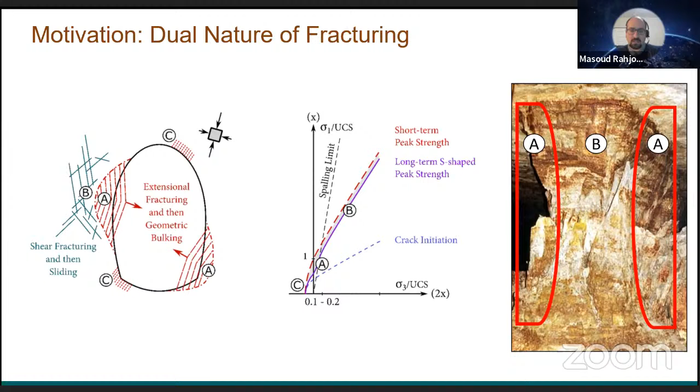However, there have been observations in the past 50 years about the formation of extensional fracturing just at the shell or perimeter of excavations under confinement. These are of main interest to many engineers, because the formation of these fractured rocks affects the support system, and can be a hazard if the fracturing progresses in a violent manner. So to understand the mechanism better, I looked at the data that was available at the time.

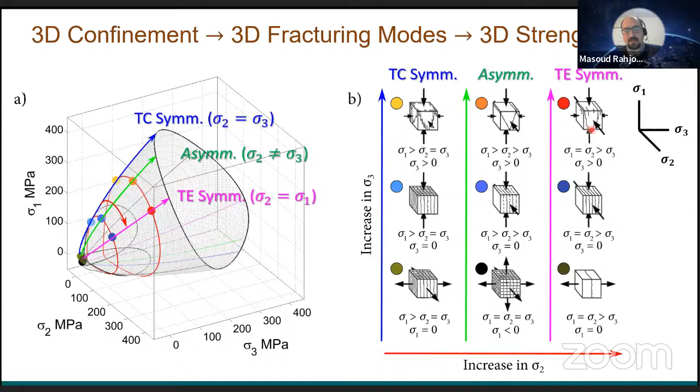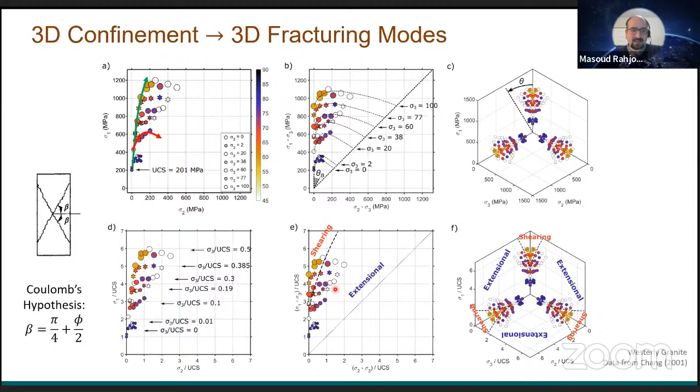With the increase of sigma 2 under confinement, we go from extensional fracturing that we had under low confinement, which becomes like planar slabbing kind of shape of fracturing. Under higher confinements, we go from shear fracturing to extensional fracturing as shown here. Please notice the amount of confinement at which extensional fracturing is expected to happen.

There are a few paradigms in rock engineering about the fracturing mode, about dilation or compaction, about friction and cohesion, fracturing under biaxial stress conditions and how it can be interpreted to a 3D stress state, failure of the rock mass under 3D stress state, and how we model it. Today I'm just going to talk about the first two, the fracturing mode and the dilation and compaction, with regards to the topic of my research.

This paradigm, as I showed for the failure modes that I summarized, has a jump that ignores the extensional fracture under low confinement. If we assume that the asymmetric fracturing is captured by Coulomb criterion under triaxial compression and triaxial extension, then there is a jump between triaxial compression stress state to asymmetric stress state, and from that to triaxial extension or symmetric stress state, in terms of failure mode.

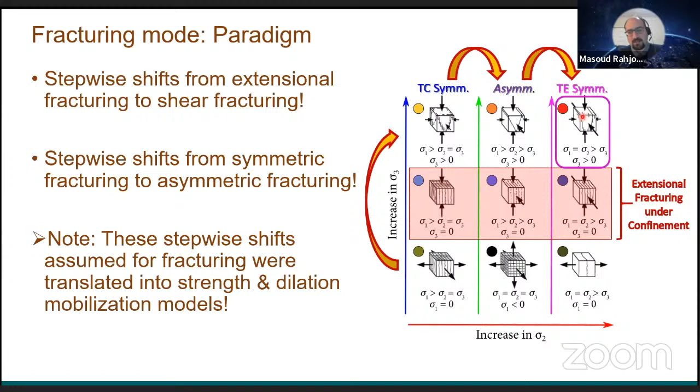Now, with regards to the fracturing, what I did was look at Coulomb's criterion in a different way. I rewrote Coulomb's criterion in terms of the effective shear stress, and then modified it to capture the multidirectionality of that. So here is the Coulomb criterion.

The interpretation here is that we get the maximum Mohr circle, and then here is the friction law, a linear friction law. We are looking for the maximum effective shear stress, which is found by finding the tangent to this circle parallel to this line.

The meaning of this criterion in 3D stress state is the envelope of the Mohr-Coulomb criterion as shown here. As you see, it's a kind of conical shape, and it is sigma 2 independent as expected. The meridians under triaxial compression and triaxial extension are shown here.

Now, to modify it, instead of only using the maximum effective shear stress on the largest circle, I use whatever effective shear stress is on the circles, wherever they are positive. So basically these three points, and again the criterion as shown here.

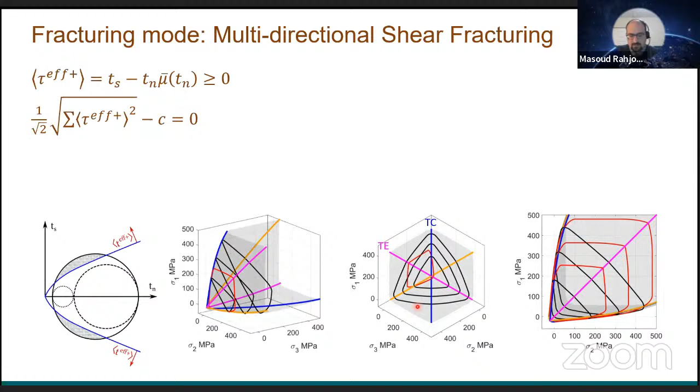With regards to the fracture mode under extensional fracturing, I looked at a parameter that can be negative under confinement as well. I looked at Mariotte's maximum axial extensional strain, but it was not enough because it is for tensile stresses. Then I looked at Navier's maximum lateral extensional strain, which means that under axial confinement or axial compression, the lateral extension can be used for the criterion.

I modified this criterion to capture the confinement dependency of the criterion as well, with application of confinement in the direction of extensional strain. Basically, the rock gets more strength, and fracture requires more extensional strain to cause fracturing.

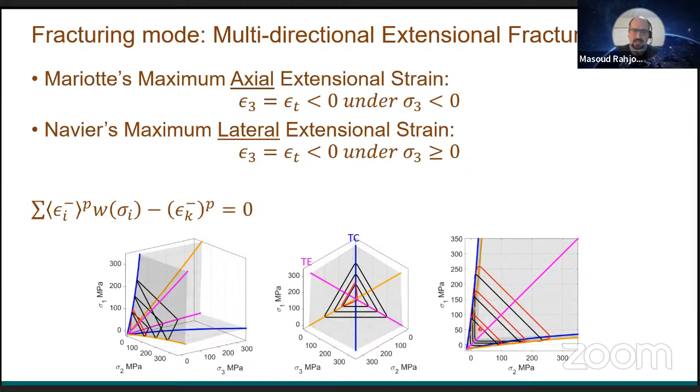The envelope of this criterion, as an example given here, is concave, surprisingly, but at low confinement it is a triangular shape in the octahedral plane, and the sigma 2 dependency is captured.

Then I combine these two, and by combining these two, we get a 3D criterion that is applicable to extensional fracturing as well as shear fracturing. Please note the S-shape curve characteristics: in low confinement, it is mostly the extensional criterion applicable for extensional fracturing, and then it switches and transits to shear fracturing, which is again 3D.

I modified the existing criteria to capture these S-shaped characteristics as well. I used 3D Hoek-Brown and Mohr-Coulomb, 3D Mohr-Coulomb. Here I show the 3D Hoek-Brown criterion.

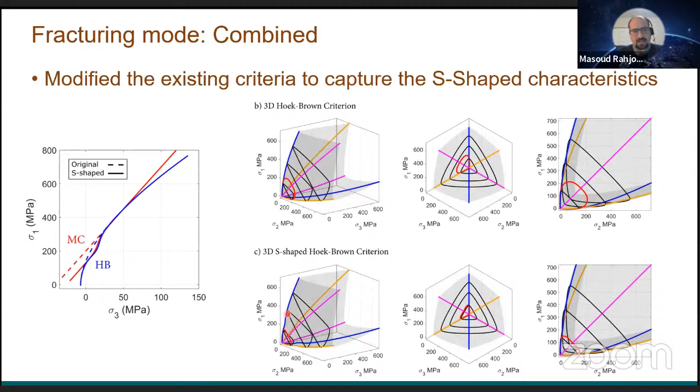As you see, it is altered in a way that it captures that S-shaped characteristics. The other paradigm I had to deal with regarding understanding the behavior of brittle rocks is related to the definition of dilation and compaction. Dilation and compaction are basically a means of understanding the relative straining of the material - for example, for a given shear straining, how much volumetric change is happening, or for a given increment of axial compaction, how much lateral dilation occurs.

Reynolds hypothesized this concept back in 1885, but for the past 140 years almost, the dominant approach to dilation has been volumetric. So even the term dilation, in the minds of geotechnical engineers or other engineers working with deformable solid material, they take it as volumetric. However, the directionality and directional definition of that is also very meaningful. The volumetric definition has been used for soil, concrete, and porous material. However, for non-porous or low porous material like rocks, the directional component is important for us.

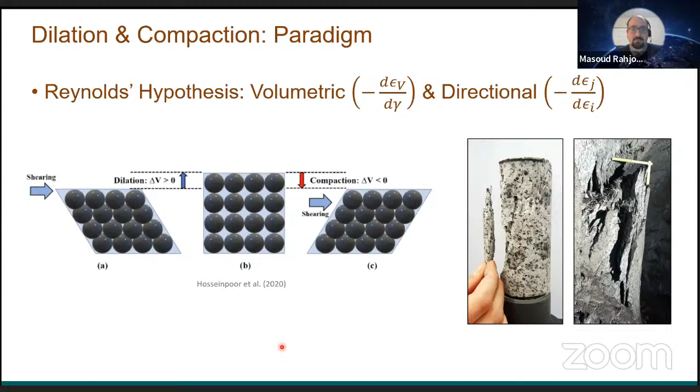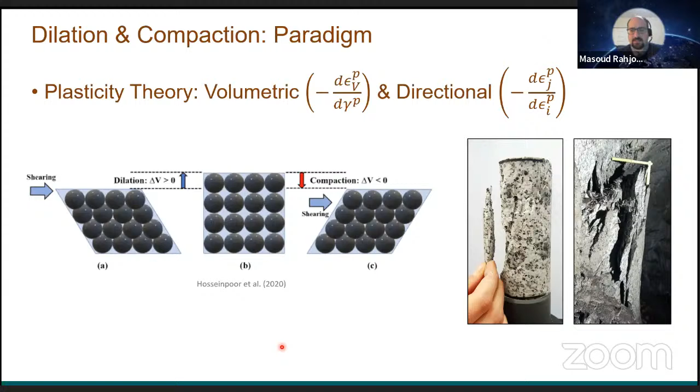In the context of plasticity theory, the ratios are defined based on the plastic strain increments, and the simple understanding of that is like the Poisson effect. The directional definition is like the Poisson effect: for a given increment of compaction in the axial direction, what's the increment of lateral extension? It's very important for us rock engineers when we think of practical cases.

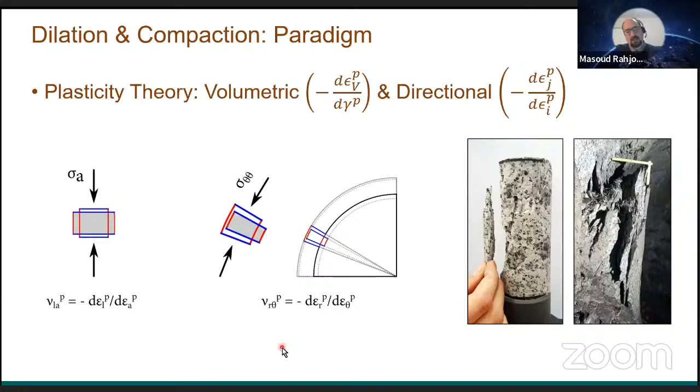For example, here is a tunnel, and we want to see how much radial deformation we get. The ratio here provides us with a means to understand, for a given amount of tangential compaction, how much radial convergence we get. Most importantly, we are interested to know how much confinement can prevent this amount of dilation, and if it is enough - this is a very important concept for the design of support systems.

As I said, under uniaxial compression, the terminology and definition is illustrated here. The ratio nu-2-1 plastic is the increment in the direction of sigma 2 versus the increment in the direction of sigma 1. Because the lateral direction is extending, a negative sign is added so that the ratio is positive when they're acting in different ways.

Under uniaxial compression states or all triaxial compression symmetric stress states, nu-2-1 and nu-3-1 are identical. There's another case, triaxial extension, which is again symmetric, but in this case sigma 2 is equal to sigma 1, meaning that in sigma 2 and sigma 1 we have compaction, and we only have dilation in the direction of sigma 3. The amount of dilation we get in the direction of sigma 3 is much larger compared to the triaxial compression case.

With increase of sigma 2, there is one intermediate stress state at which the influence of sigma 2 diminishes the amount of dilation we got under triaxial compression, and basically all the dilation goes towards the direction of sigma 3. With increase of sigma 2, we see a decrease in nu-2-1 and increase of nu-3-1.

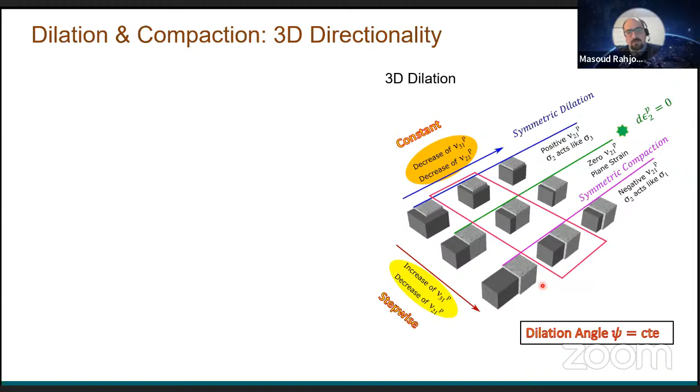Here is the relation between nu3/1 and nu2/1 for different sigma 2 values. The influence of sigma 2 is captured here with the stress ratio B. When sigma 2 equals sigma 3, triaxial compression, B is 0. When sigma 2 equals sigma 1, we are dealing with triaxial extension, and B is 1. For example, with a dilation angle of 36.87 degrees, the dilation angle under triaxial compression gives nu3/1 of 2, and it jumps to 4 as soon as we get to asymmetric stress conditions, where sigma 2 is not identical to sigma 3 or sigma 1. Under triaxial extension, it jumps again, becoming 8.

Under triaxial compression, nu2/1 equals nu3/1, and then as soon as it gets asymmetric, it drops to 0, because essentially the model is sigma 2 independent. This sigma 2 independency of the Mohr-Coulomb model is captured here, as well as here, but it's 0 — epsilon 2 becomes 0 basically. Then under triaxial extension, it becomes -1.

The trend is that nu3/1 increases with sigma 2, or increase of the B ratio, and nu2/1 decreases from whatever value it has under triaxial compression to the value it has under triaxial extension. The important point here is that there is a stress state at which epsilon 2 plastic becomes 0, and this differentiates the behavior of sigma 2.

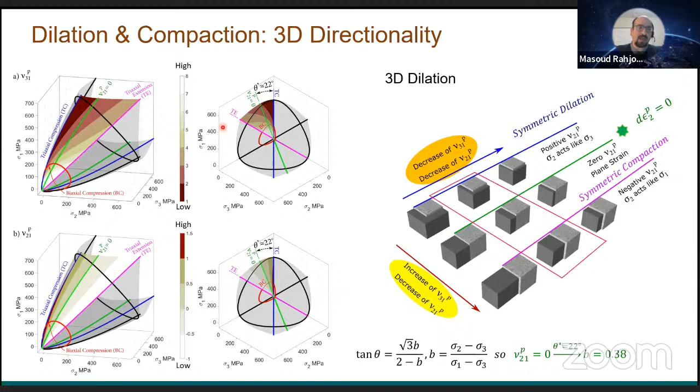There is a specific angle here, or stress state, theta star, related to that B, which gives the plastic plane strain condition. For this example, this angle is 22 degrees, meaning that for theta values or stress states close to TC, sigma 2 acts like sigma 3, and after that, sigma 2 acts like sigma 1. That is what this illustration captures.

To conclude, the 3D confinement affects the 3D fracturing mode, and these fracturing modes shape the way we think about the strength of the rock mass. The ignored cases of failure under low confinement, which are extensional modes, can be captured using an extensional strain criterion.

The extensional strain criterion presented is 3D, meaning it is 3D confinement dependent. The shear fracturing is also 3D, captured by understanding that shear fracturing is a 3D mechanism happening in all fabric orientations. By combining these two, we can get the full spectrum that we wanted to have.

Again, 3D confinement causes 3D fracturing of the rock with different modes, and these modes are comparable to the dilation framework I present. Under lower confinement, where we have extensional fracturing, whatever value we have for nu3/1 gets higher, and this nu3/1 gets higher as soon as the extensional fracturing becomes more like slabbing.

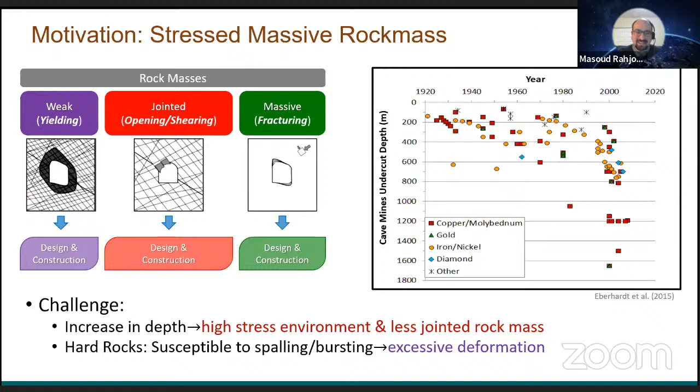This is excellent work and certainly an advancement of constitutive models in rock mechanics. I'm curious as to how you envision this work being incorporated more into rock engineering practice. Awesome question. You're pointing out basically to the three paradigms that I left out, which are with regards to how we model yielding of brittle rocks.

The existing paradigm is that cohesion and friction mobilize at the same time, and the way that most people are doing this work is through co-mobilization, a synchronized mobilization of cohesion and friction. However, the work of Hajiabdolmajid, Martin, Diederichs, and all these great researchers shows that we have to move on to cohesion-weakening, friction-strengthening concepts and use that.

The other thing is that there was an era in rock engineering where we had to rely on theories. We didn't have the luxury of having true triaxial machines, and we had to rely on theories. So at that era, around 40 years ago, we tried to bring whatever theory we had in fracture mechanics and apply that to rock engineering. And sometimes those theories don't exactly match the reality of the behavior.

The case of biaxial stress condition is one of those. There are many cases where criteria were developed for biaxial stress conditions, meaning you have a thin plate of rock or material. And then because of lack of material, fractures don't form the way we'd expect in a 3D body where there's enough material to form. So those criteria, like the Griffith criterion, that have been extended for general use, we should look back on those theories and revise their applicability.

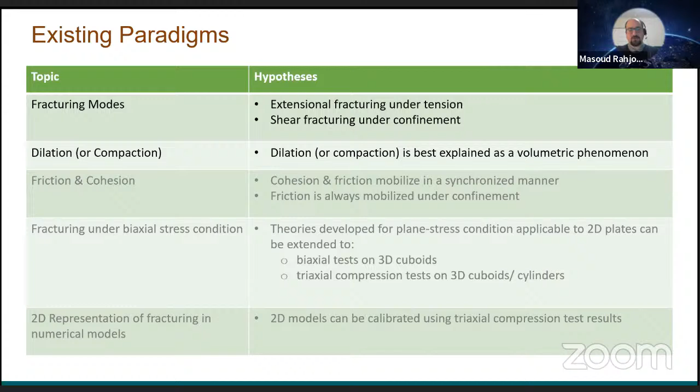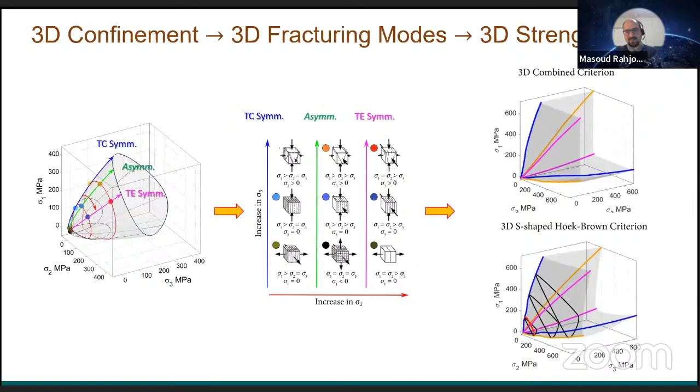Now, the implications of this 2D modeling, in my belief, are preventing us from moving forward. The way these codes are calibrated using triaxial compression tests is not, in my belief, the correct way, because when you consider the case I showed - one example I can probably share with my friends here - the plastic plane strain case, where you don't have any out-of-plane strain, is the case we are modeling in 2D when you have fracturing.

Under this case, the strength of the rock mass is higher than in the case of triaxial compression.

And the amount of dilation that this gets is at least double the value of dilatancy that you get under triaxial condition. So when you calibrate your model using triaxial compression tests, while the reality of behavior is this one, it gives you wrong results. If you get the same parameters and run a 3D model, you will get different values, which seem to be controversial, wrong, in your mind, but the reality is the code capability prevents us to go forward.

So I suggest, and what I see in the future, and I hope that we move fast, is that we get out of this 2D modeling and present the real behavior using 3D modeling.

Very good. Thank you, Masoud. I hope to see that day come soon. It will, I'm sure. Perfect.

Does anybody have any other questions for our speaker? I have a curiosity, if I can. Please. Yes. Okay, thank you very much for your presentation, also for the clarity in your speech.

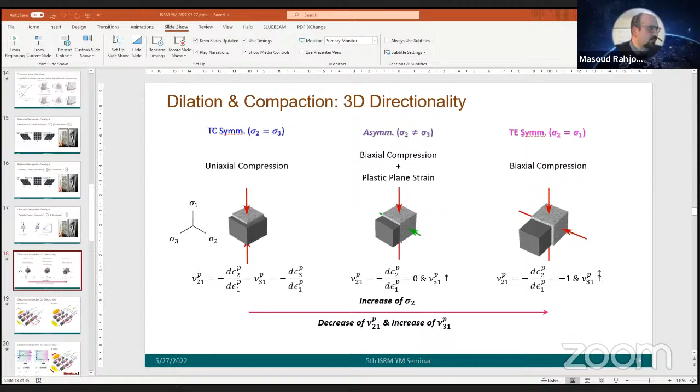Oh, sorry. Do you see my screen? I'm just curious. Do you see my screen in my PDF? We see the PowerPoint. I'm sorry, we see the dilation, compaction, 3D directionality. Yes. I'm sorry, one second. I'm going to share the other slide. Screen 1, maybe. No, screen 2. Yes. So now you see that, right? You see my PDF, yes.

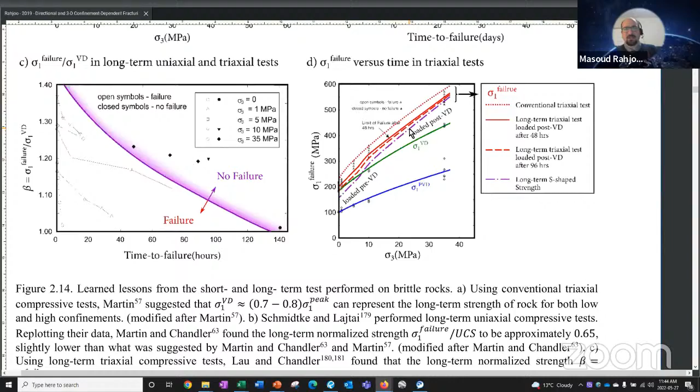Right? Okay, so yep, Dr. Chandler tested under basically controlled tests, basically this is a creep test kind of a way that he increased the level of sigma 1 and waited until it fails, and found the failure. Developed the envelope for these tests.

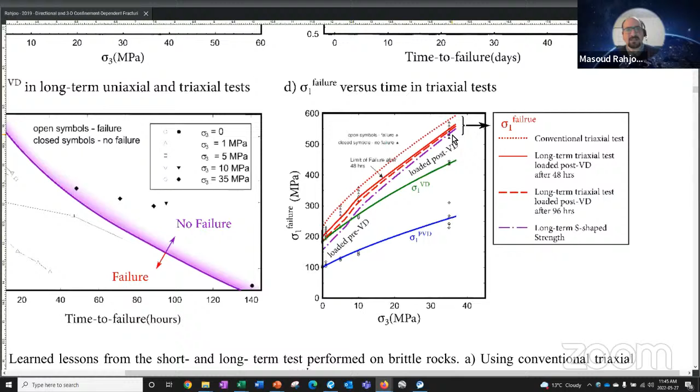Short-term tests versus long-term tests show that the decaying strength is not that much under higher confinement where shear fracturing is expected to happen, versus in low confinement, there is clear reduction of strength, right? So that idea about the S-shaped curve is kind of captured in his results.

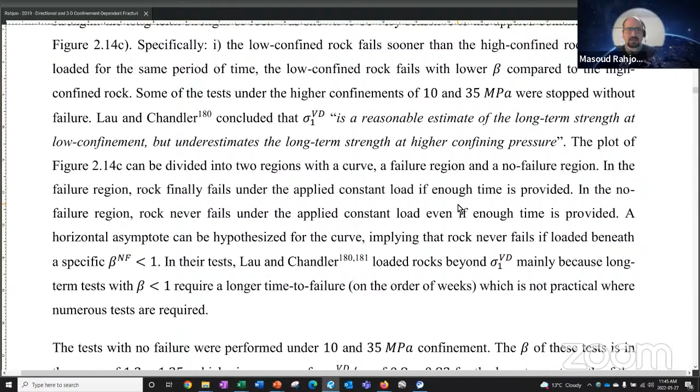What I did, I used triaxial test data that, again, Professor Chandler performed, and plotted the results in a way that are shown here. So sigma 1 versus sigma 3, crack damage, initiation, crack damage, or volumetric reversal, basically, and this is peak. Now, by plotting sigma 1 of each of these curves versus sigma 1 peak, you can find the stress confinement, basically, at which a transition between spalling to shearing happens.

So basically, when you plot the crack initiation, you see that it decays and gets a constant value, whereas the other one, for the crack damage or volumetric reversal, is constant. The other way to plot it is plotting sigma 1 over the crack damage. In this case, you see that this way, the other plots go up and get to a constant value. Or sigma 1 versus sigma volumetric reversal. Now this is it, and then again, you see that there's a spalling to shearing transition. So there is a way to find that spalling to shearing limit.

Numerically, people have done that as well. Professor Diederichs did that, as well as many others after him. Still, there is not a standard method to find this. I've not seen that yet. Maybe in the past year, I was involved in consulting, something came out, but I have not seen that.

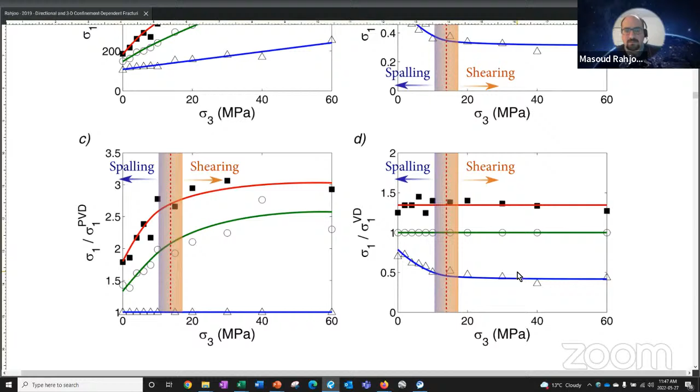However, when it becomes true triaxial with platens, measurement of that was hard until like 5-7 years ago, when people started measuring that. So basically what I'm offering is a hypothesis and a framework for more work.

At the end of my research, I saw a publication from the team of Professor Feng from China, where he did some analysis on the plastic strain increments ratio in true triaxial tests. But still, this is something that is going forward.

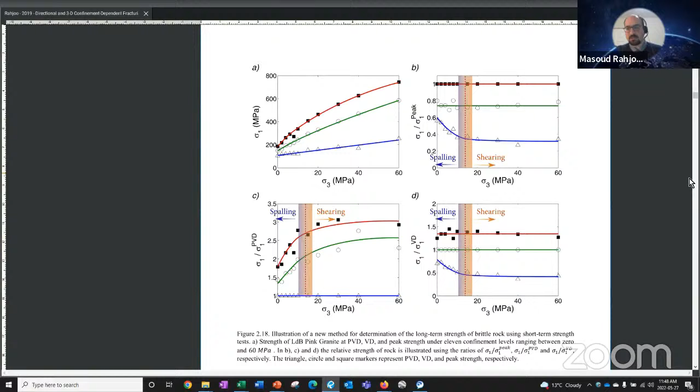With regards to constitutive modeling, this framework gives us some boundaries to know which criterion to use and which one would not work. For example, if you use the Drucker-Prager criterion, you might get a very, very large sigma 2 dependency kind of behavior, as shown here.

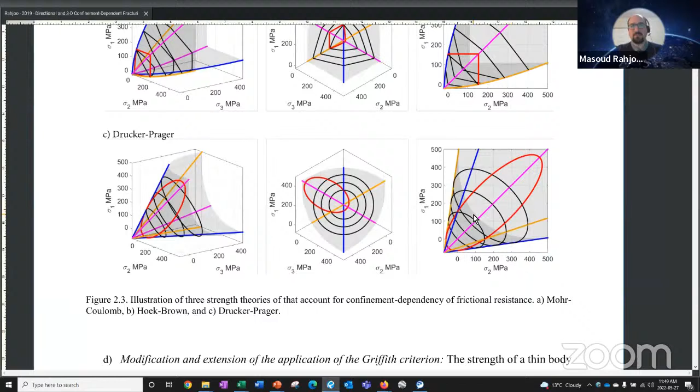And this framework can limit us from going this much high on the strength curve.

On the strength side, and also on the dilation side, the framework that I presented gives a correct understanding of what boundaries should be used, again for Drucker-Prager or other potential functions, models and formulations. It gives us a clear understanding of what is happening and how to parameterize the constitutive model so that it is not wrong, if it's not right.

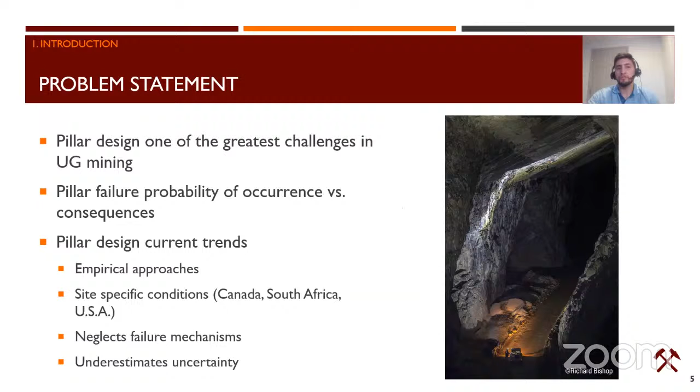A pillar failure is a low probability event in comparison to other ground control instability issues such as rock falls or ground collapses. Nevertheless, their consequences are far more severe. The collapse of a pillar often leads to the collapse of its neighboring pillars, also known as a cascade pillar failure. Pillar failures have not only killed and caused serious injuries to workers, but have also generated surface subsidence.

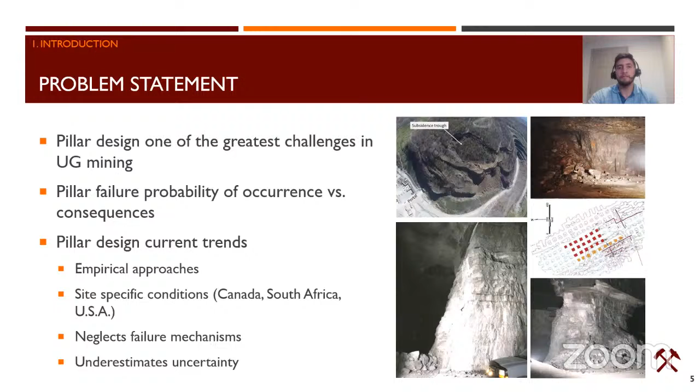And sterilized valuable reserves. Common pillar design trends are based on empirical approaches, and these relations are designed in most cases based on site-specific conditions, applicable only under certain specific circumstances. These equations are unable to represent the different failure mechanisms that can occur in pillars and do not consider geological and geotechnical uncertainty in the rock mass.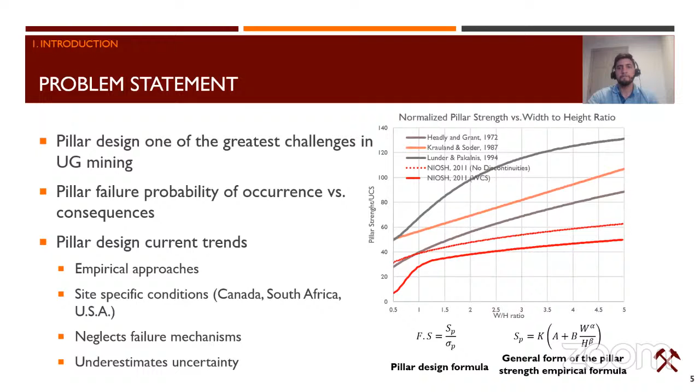As a reflection of this, pillar failures continue to occur, both within the US and internationally. In the past 5 years, there have been 5 massive pillar collapses in the US. This has raised the awareness and attention of the Mine Safety and Health Administration, MSHA. They developed an initiative called the Pillar Collapse Initiative, a dedicated website focusing on raising awareness on these issues and sharing technical content to prevent these events from continuing to occur.

As we can see, pillar collapses are events that can be referred to as high-risk events. Due to that, their design and maintenance should be addressed from a risk-based perspective.

This work proposed a risk-based pillar design approach based on laser scanning and virtual discontinuity mapping, stochastic discrete element modeling, and stochastic finite volume modeling to estimate pillar stress variability. Today, I will be presenting some of the results obtained from applying this methodology in a case study mine.

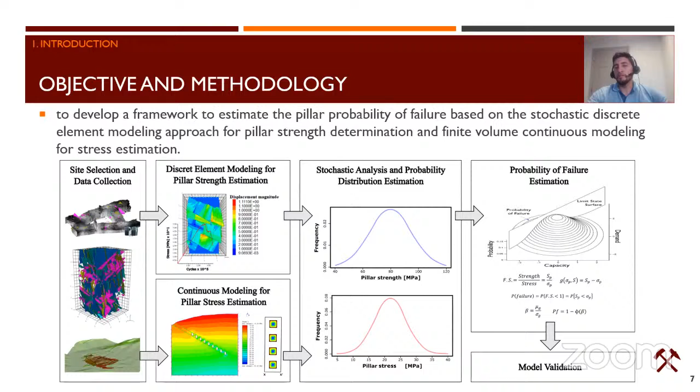In this section, I will briefly introduce the case study mine, design, and geomechanical parameters that were used as inputs in different analyses of this project.

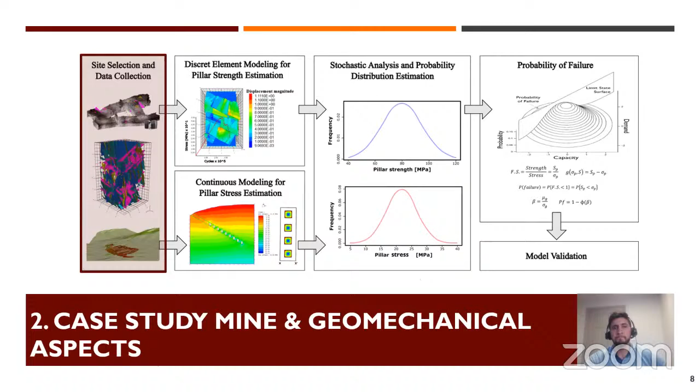The case study mine consists of a room and pillar operation with eventual stoping. In areas of the mine where the limestone seam is consistent and thick enough, 12.8 meter wide and 30 meter high stopes are formed. The open stopes are supported by squared, 24 meter wide and 30 meter tall pillars. The main ground instability hazards encountered in this case study mine are related to the presence of discontinuities and karst features. Due to the presence of a clear discontinuity network in the rock mass, the main failure mechanism defined was structurally controlled.

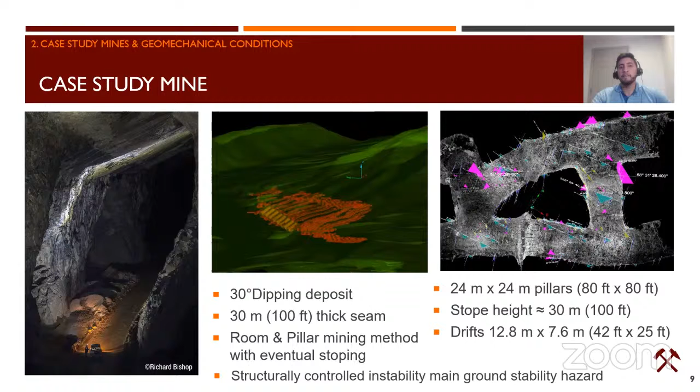The table below summarizes intact rock mechanical properties for the three main lithologies. This data was provided by the mining operator and consisted of 6 density test results, 6 uniaxial compressive strength tests, and 6 Brazilian tensile test results for each lithology. This information was used as inputs for the different analyses and calculations. The data was limited to the number of samples mentioned, and it was not clear where the samples had been collected from.

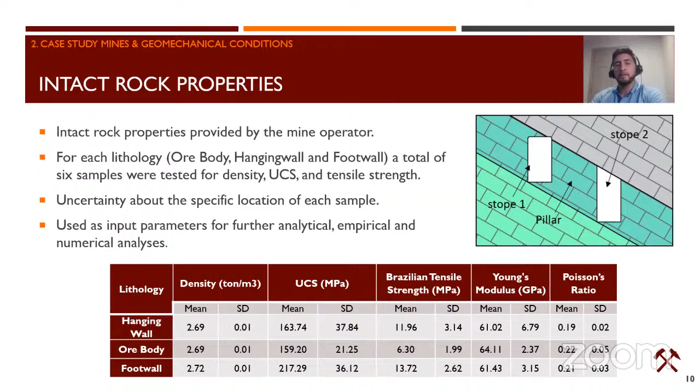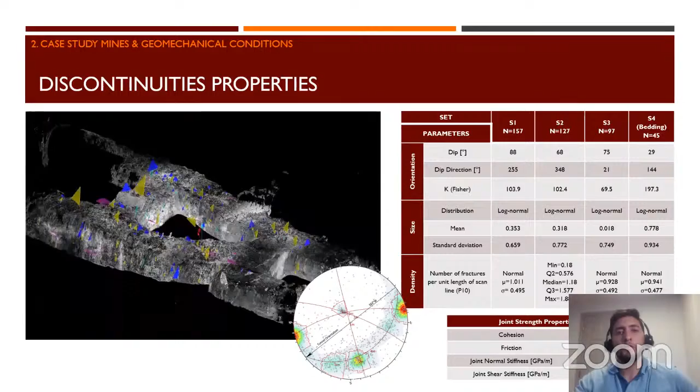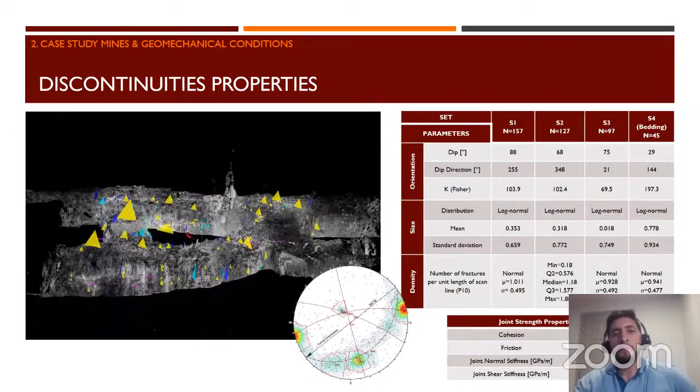Due to the structurally controlled failure mechanism, a laser scanning campaign took place in the case study mine. The video shows the virtual discontinuity mapping in one of the scan sections. In general, 4 main discontinuity sets were defined, where set 1 corresponded to a subvertical discontinuity parallel to the dip line of the ore body, sets 2 and 3 corresponded to oblique fractures, and set 4 corresponded to the bedding plane. The orientation, size, and frequency properties are presented in the following table. These values were used to generate discrete fracture networks in the following analysis.

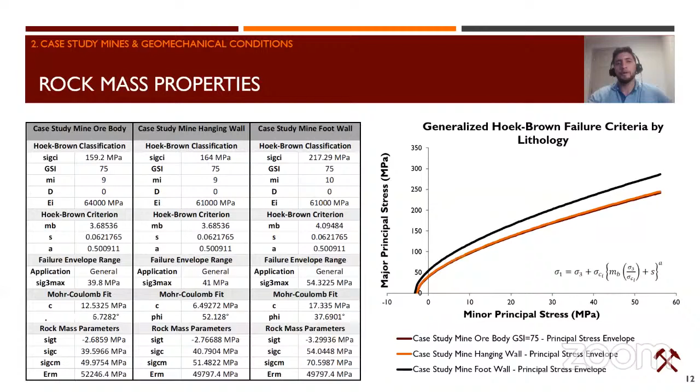Finally, with regards to pillar stresses, there were no direct stress measurements in the case study mine. Therefore, secondary information from the World Stress Map was used to estimate the orientation of principal stresses with respect to the mine's excavations. This information was used to account for different stress scenarios in the stress estimation section of this work.

In this section, I will introduce some pillar strength estimates using empirical pillar strength equations, and these values will be compared with results obtained from the stochastic discrete element modeling approach for pillar strength estimation.

The Hedley-Grant, Krauland and Soder, Lunder and Pakalnis, and NIOSH empirical pillar strength estimation equations were used to estimate the strength of the case study mine pillars, considering their width to height ratio and the intact rock strength properties.

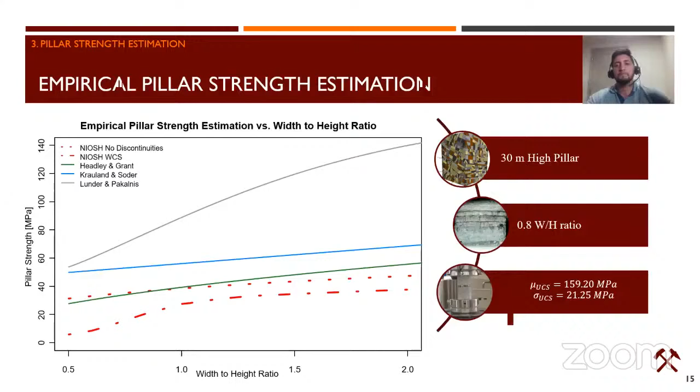This factor enables us to consider the effect of discontinuities on the strength of pillars. The following graph shows a range of pillar strength values for the case study mine, considering each discontinuity set's properties. This formula only allows accounting for one discontinuity set at a time. Since the bedding plane, or discontinuity set number 4, is the most continuous discontinuity, the strength of the pillar in the case study mine, considering the effect of discontinuity set 4, was selected as the case study mine pillar strength reference value.

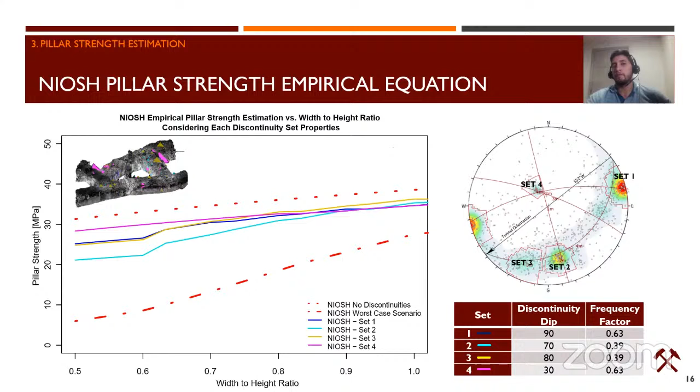Taking into account that the only variable parameter in empirical equations is the intact rock compressive strength, given the intact rock strength standard deviation, it is possible to estimate the pillar strength standard deviation for each of the empirical methods.

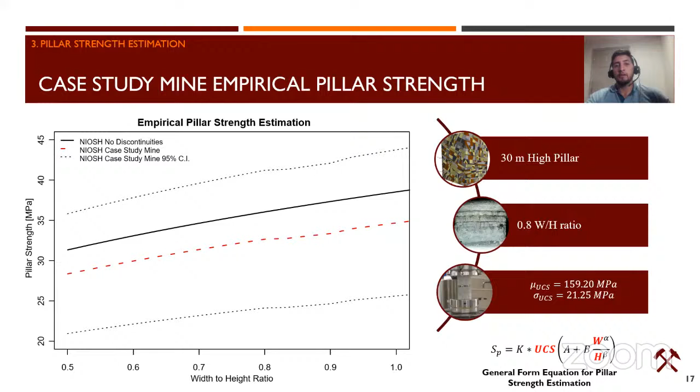Results obtained here will be used to compare numerical pillar strength estimation values. The following figure shows the methodology used for the stochastic discrete element modeling approach for pillar strength estimation.

A multi-scale DFN approach was used so only those discontinuities that were large enough to cause a structurally controlled failure in the pillar were accounted for explicitly. This also allowed us to reduce significantly the number of elements in the simulation and therefore the processing time.

Three different modeling approaches using the discrete element model were evaluated: one considering elastic intact blocks intercepted by discontinuities, a second one using deformable elastic perfectly plastic intact blocks intercepted by discontinuities, and a third one simulating the intact rock using a bonded block method approach also intercepted by discontinuities.

The bonded block method was selected since results from this approach yielded reasonable pillar strength values while still capturing the structurally controlled failure mechanisms within reasonable modeling times.

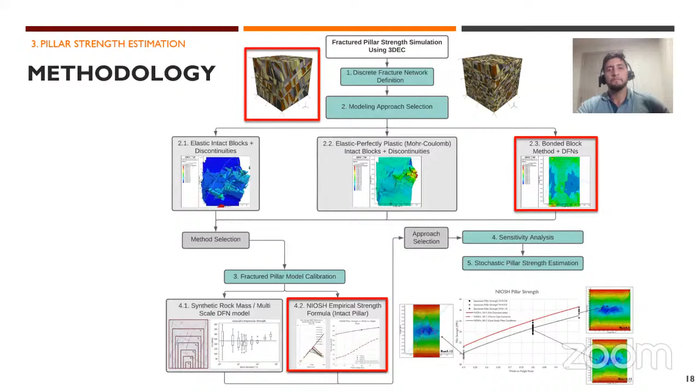The following graph shows the stochastic results for the discrete element modeling of fractured pillars for three different width to height ratios. The stochastic model enabled us to characterize the variability on pillar strength due to the presence of discontinuities.

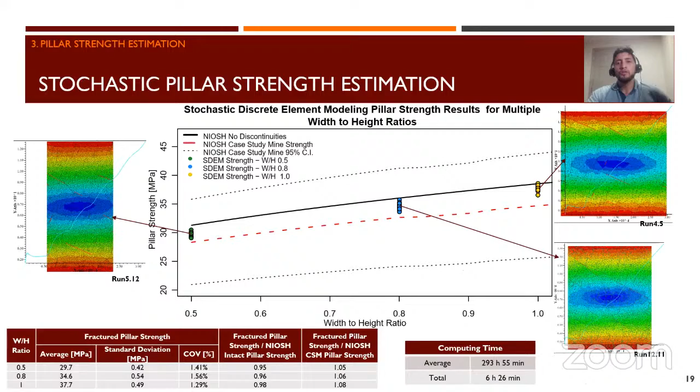Pillar strength for each width to height scenario showed good fit with the normal distribution. The table below shows the results for the mean and standard deviation for pillar strength at each width to height ratio.

This table also compares the mean fractured pillar strength values, the NIOSH intact pillar strength estimation, and the NIOSH case study mean strength estimation. For all three width to height ratios, a coefficient of variation close to 1% was obtained.

This value is much lower than the coefficient of variation of the intact rock strength, which is around 13%. This indicates that the variability due to the presence of discontinuities is negligible in comparison with the variability attributed to the intact rock strength variability.

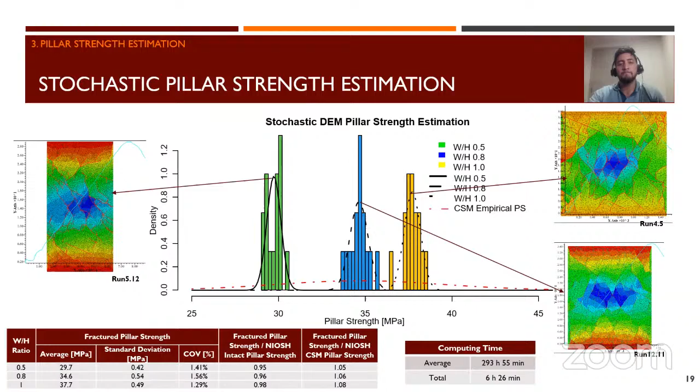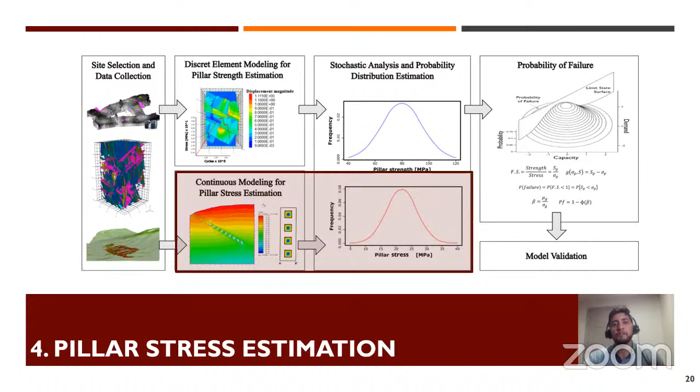In this part, I will talk about stress estimation in the case study mine. Analytical solutions and 2D finite element models are commonly used to estimate stress applied to pillars in underground mine excavations.

In this work, the incline pillar stress formula proposed by Pariseau was used to analytically estimate stresses on the pillars in the case study mine. This approach is an extension of the tributary area theory that allows us to account for the dip of the deposits.

A two-dimensional finite element numerical model was done using the software RS2 from Rocscience. This simulation considered elastic materials and used the generalized Hoek-Brown constitutive model properties that were presented in earlier sections.

A cross-section through the center of the study was defined and the gravity-induced field stress was considered, and stresses were measured across the center of the pillars.

A finite volume model of the case study mine was performed using the software 3DEC. A simplified 3D mine model was made in Rhinoceros, and the geometry was imported into 3DEC using the plugin Griddle.

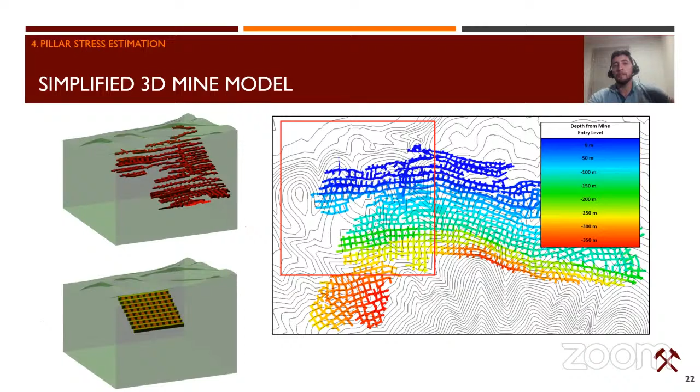The pillar stress estimation was performed using an elastic approach and the rock mass elastic properties for each main lithology in the case study mine.

Three stress scenarios were evaluated assuming different vertical to horizontal stress ratios, as shown in the table. From the world stress map, we knew that the maximum principal stress was the one parallel to the strike of the ore body.

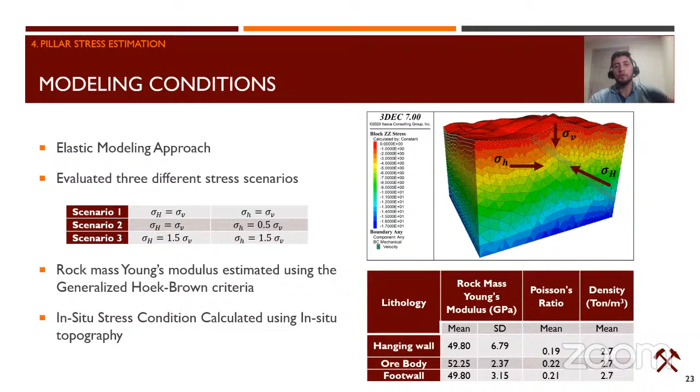A FISH function was developed to map and calculate average vertical stress for each pillar in the simplified pillar arrangement model. This function assigned a number to each of the pillars, beginning on the bottom left corner pillar with 1 and increasing to the right and then up to pillar number 72 on the top right corner of the pillar arrangement. The function looped through all the zones of each pillar and calculated the average vertical pillar stress by adding all zones' vertical stresses and dividing this by the total number of zones contained in each pillar.

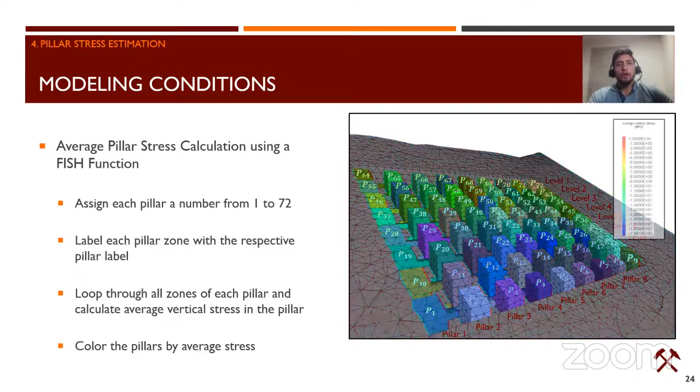Once the average pillar stress was determined, each pillar was colored by this value as indicated in the last figure.

Some of the assumptions that explain why the analytical solution yields higher stress values are that it assumes a flat surface on top of the pillar, it neglects the ground's self-supporting capacity, and ignores the effect of the out-of-the-plane stresses.

On the other hand, some of the reasons that explain the stress underestimation of the 2D numerical solution are related to the assumption that pillars are infinite in length and that the topography remains constant in the out-of-the-plane direction.

From a safe design standpoint, it is recommended not to use a 2D solution to analyze this type of problem, since it was shown in the results that 2D solutions may underestimate stress magnitudes on pillars.

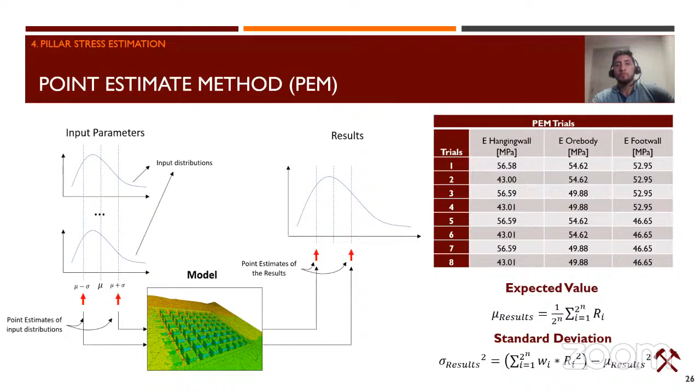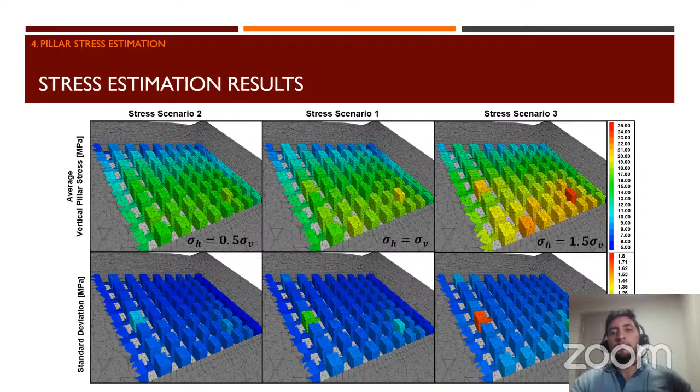In all 3 scenarios, the pillars with the highest stress values were also those that presented the highest standard deviations. The following graph summarizes the previously shown results. It shows average vertical pillar stress for each of the pillars at different pillar stress scenarios.

In addition, the 95% confidence interval was defined using the standard deviation obtained by the point estimate method.

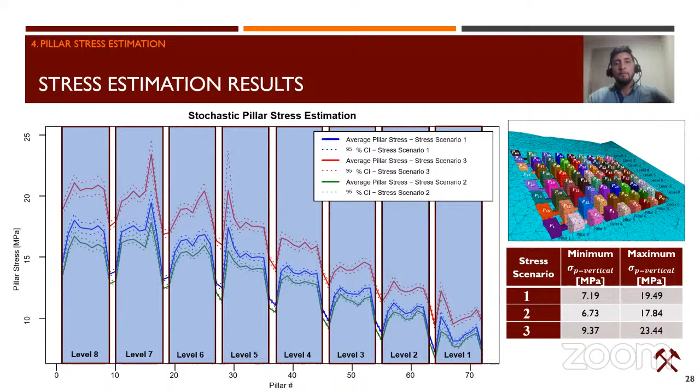Pillars underneath gullies presented less load than those below the spurs. In addition, pillars located on the abutments carried less load than their fully excavated neighboring pillars. This could be attributed to the self-supporting capacity of the ground, or the pressure arc.

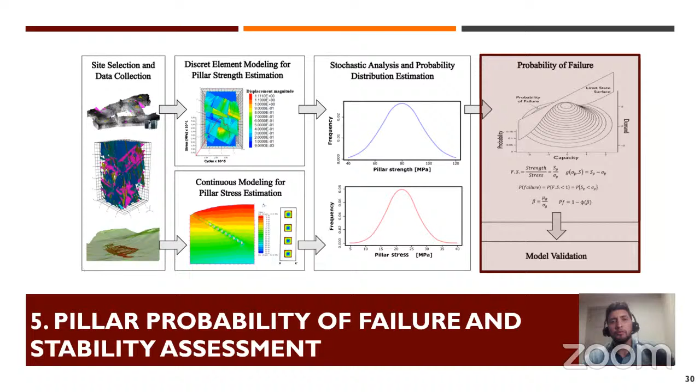In this final section, results from both stress and strength estimations are combined to estimate a pillar probability of failure in the case study mine. Finally, results from the numerical modeling approach will be compared with photorealistic 3D models as a way of model validation.

Reliability analysis allows us to estimate the probability of failure of an engineering system by considering the probability distribution function of the controlling variables. In our case, the only variables that control the stability of the system are pillar strength and pillar stress.

Pillar stress average and standard deviation values were obtained for each of the pillars in the case study mine. Since all pillars in the simplified arrangement have the same geometry, all of them are assumed to have the same strength distribution. The average strength was defined as the strength obtained from the stochastic discrete element model, and the standard deviation was considered as the standard deviation obtained from considering intact rock's compressive strength in the NIOSH empirical equation.

Since, as discussed in the previous chapter, the effect of intact rock variability had a more significant effect on strength variability, a limit state function is defined as the difference between the strength and stress. Therefore, the probability of pillar failure is defined as the probability that the limit state function yields negative values, considering the bivariate distribution and assuming that both variables are uncorrelated. The calculation of probability of failure is performed using equations that consider the mean and standard deviation for the strength and the stresses.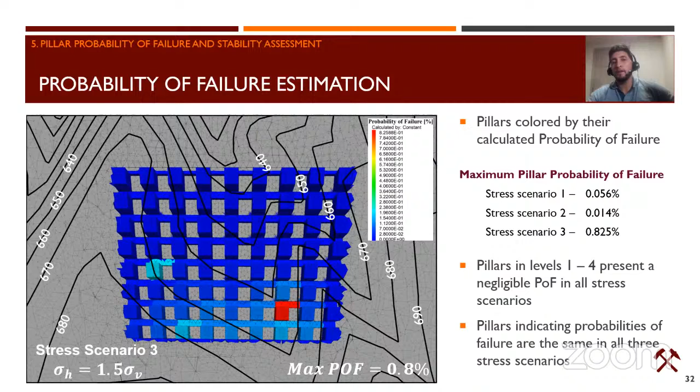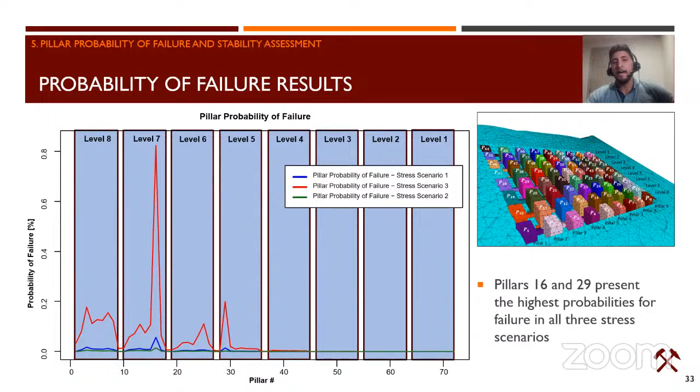In all three scenarios, pillars from levels 1 to 4 did not show any significant probability of failure, and pillars with the highest probabilities of failure were always the same. This figure summarizes the pillar probability of failure results. It is possible to observe that pillars 16 and 29 present the highest probability of failure in all three scenarios. In addition to probability of failure, factor of safety was also calculated for all the pillars.

It is possible to observe that those pillars with a significant probability of failure were also the same ones that presented a factor of safety below the recommended design standard of 1.8 for stone mines in the United States.

It is worth mentioning that the actual horizontal to vertical stress conditions of the mine are not determined. These results don't indicate that pillars are not under compliance. This analysis indicates that horizontal to vertical stress ratio is a parameter that has a relevant influence on pillar probability of failure and factor of safety calculation. Therefore, mining operators should invest resources in characterizing this important parameter.

The question that arises with these calculations is, what is an acceptable value for a probability of failure? Current pillar design standards are only based on factors of safety. Therefore, there are no recommendations for what an acceptable probability of failure could be. Probabilities of failure are usually not considered since their interpretation may be more difficult, and the word failure is implicit in them.

However, designing only based on factors of safety does not make the uncertainty associated with the design parameters go away. Conversely, this prevents engineers and decision makers from acknowledging the variability associated with these design parameters. Current international ground control best practices recommend the integration of risk management principles to ground control in underground operations. The proposed design approach, based on the estimation of pillar probabilities of failure, offers an additional tool for integrating risk assessment practices into the design of pillars in underground mines. These practices can be adopted in operations through the design and implementation of ground control management plans.

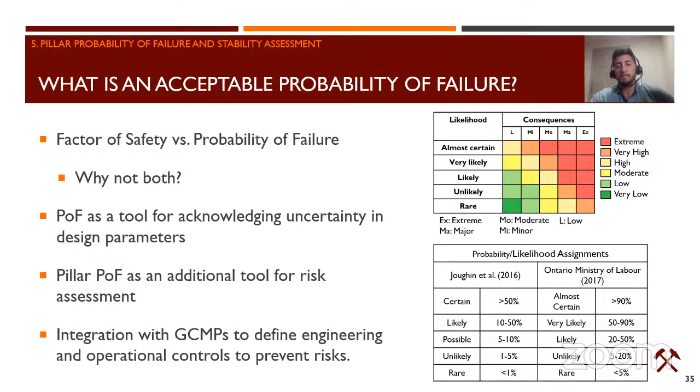One way of defining acceptable probability of failure values is by comparing results from factors of safety and probability of failure obtained from the numerical models and calculations. When comparing these results for the particular case study mine, we can observe that a probability of failure of 0.05% corresponds to the minimum factor of safety recommended in the current stone mine design guidelines of 1.8. This comparison could be implemented at other sites in order to define a particular probability of failure for each specific site.

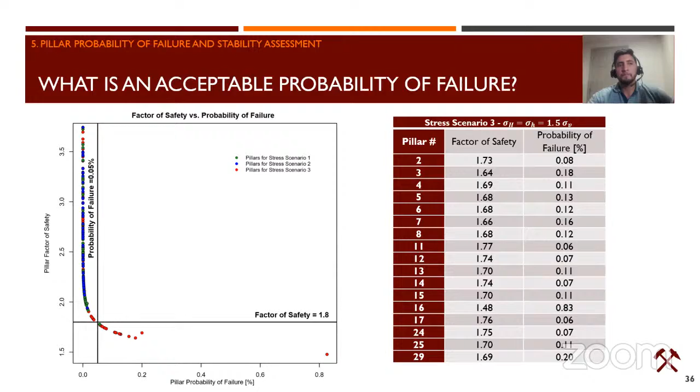As a way of validation, both pillar stress and pillar strength models were considered together to evaluate the stability of a specific pillar in the underground mine. This particular pillar was also laser scanned and photographed, and results from the simulations were compared with 3D photorealistic models of this pillar underground.

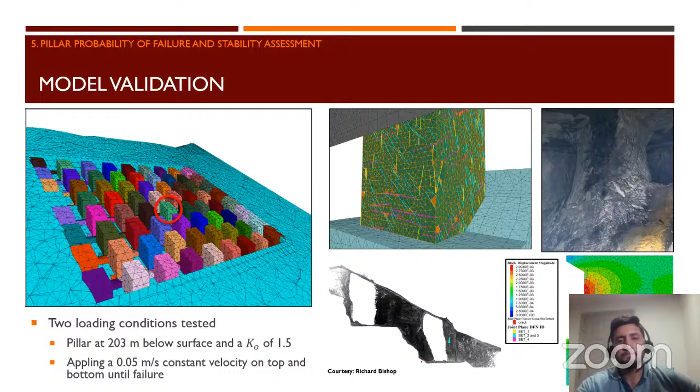Results from this comparison enabled us to observe maximum displacements in the order of 3 mm. We also observed that areas with larger deformations were located on the faces exposed to the stopes or the drifts.

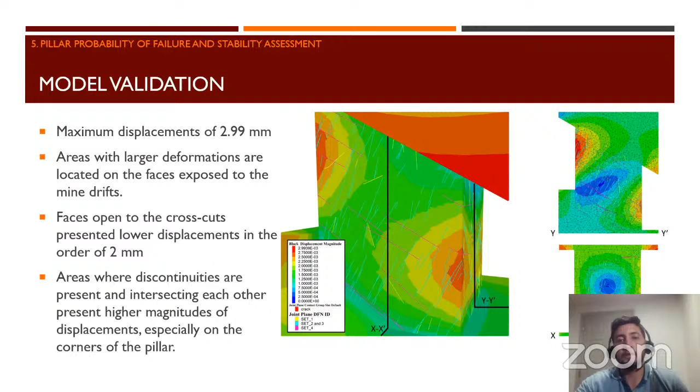Also, the faces looking at the crosscuts had less displacement, particularly areas in the corners where the intersection of discontinuities would occur would present the highest deformations in the model. With regards to pillar stresses, the areas of the pillars that presented less displacement were those that presented higher compressive stresses.

The maximum stresses recorded in the simulation were in the order of 21 megapascals. For this particular case, no bonded block failure was observed in this model, indicating that the pillar selected for this study did not present any significant failure.

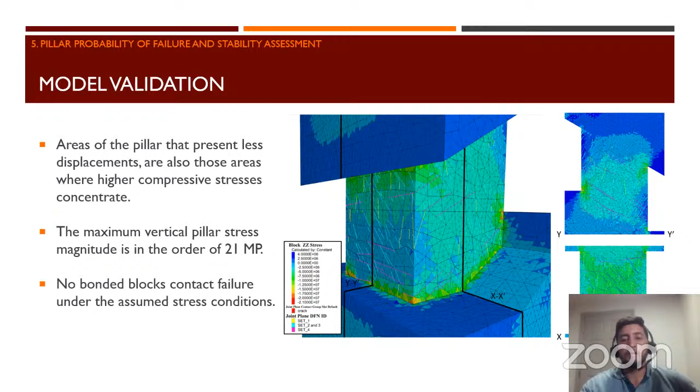According to the model, by comparing these results with the resulting point clouds from the laser scans and photogrammetric model, we were able to observe some correlations between both models. In our numerical model, we observed that the areas with larger deformations were in the corners of the pillars where discontinuities would intersect.

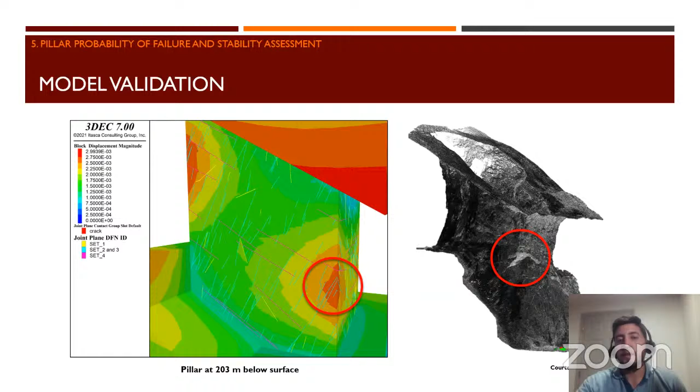In our 3D simulations, those areas that we identified with larger deformations were areas where material had been removed from the pillar due to sloughing or scaling. These pictures show how the discrete fracture networks used in the simulations resemble the structurally controlled instabilities observed in the periphery of the pillars.

As a conclusion, pillar collapses are high-risk events that continue to occur in the United States and abroad. Therefore, risk-based approaches are necessary to design new mines and to evaluate legacy workings.

In this work, we have proposed a risk-based pillar design methodology that integrates multiple technologies such as laser scanning, discrete fracture network generation, stochastic discrete element modeling, and stochastic finite volume modeling. This methodology was tested in a case study mine.

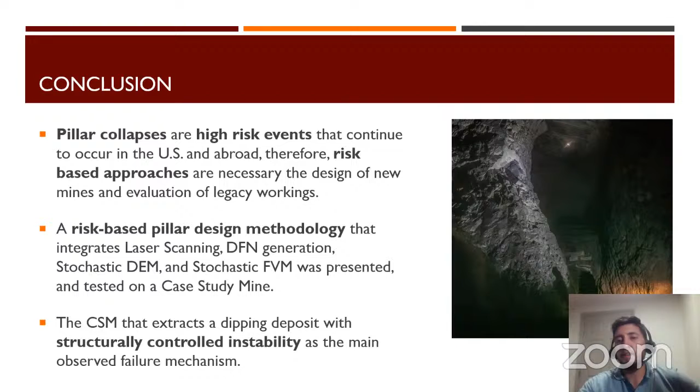The case study mine presented a main failure mechanism that was defined as structurally controlled. A stochastic discrete element modeling approach integrating the bonded block method as well as the filtered discrete fracture network was used to estimate pillar strength and evaluate the variability of pillar strength due to the presence of discontinuities.

We also observed that the stochastic discrete element modeling approach with the bonded block method enables us to represent and reproduce the structurally controlled failure mechanisms while still obtaining variables comparable to current industry design standards, for example the NIOSH empirical strength equation.

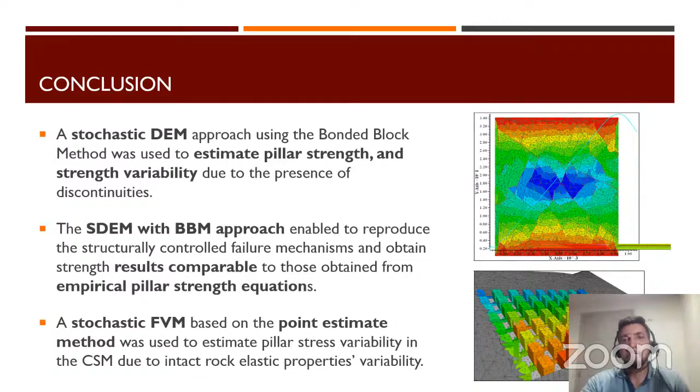We also performed a stochastic finite volume modeling approach for estimating the effect of intact rock elastic properties variability on pillar stress in the case study mine. These were combined using the reliability method to estimate pillar probability of failure in the case study mine.

This design methodology can be used as a probabilistic risk analysis approach to evaluate and identify areas of the mine that may be of concern. Finally, a stability assessment was performed by comparing results of a particular pillar in the case study mine with results from laser scans and photos taken in the mine.